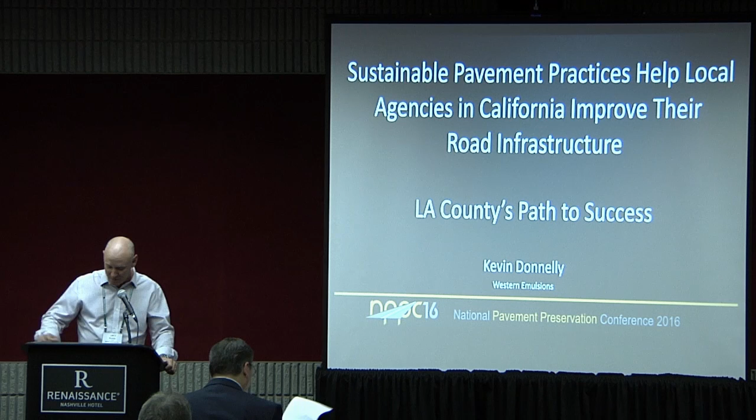Right now, agencies have less money. They're trying to take a limited amount of dwindling funds and stretch those dollars further. We keep getting hit with gas tax issues that are taking money out of the system.

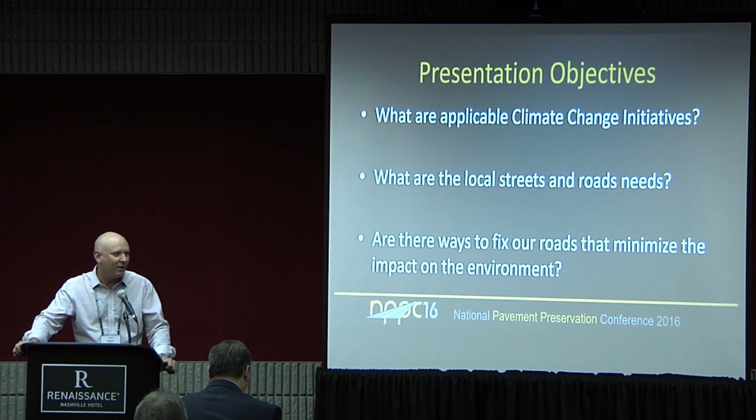So in a time like this, some of the questions that were asked are: what are the applicable climate change initiatives that we have, and we'll talk about those today. What are the needs of the local streets and road system in California? And are there ways to fix our roads that minimize the impact on our environment, that kind of fall in line with some of the things that the government is asking us to do?

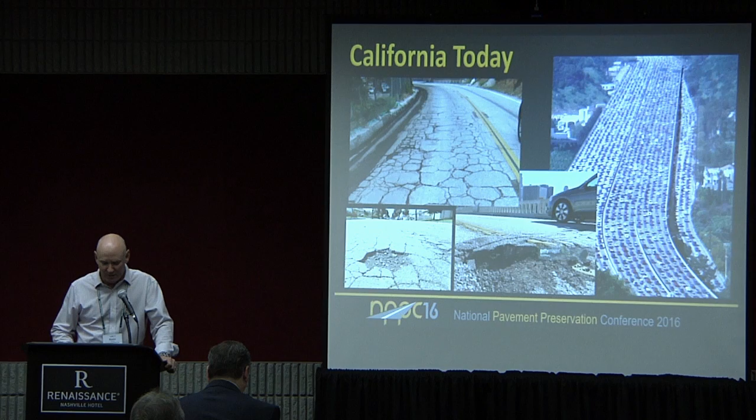So California today is much like a lot of other states. We have a lot of congestion in California, as some of you know who visited some of our metropolitan areas. We have an infrastructure that I wouldn't say is failing, but is on its way to failing with the amount of funding that we're putting into the system. So we have a lot of challenges.

One of the things that local agencies have been tasked with is how do you do more with less? Can you maintain your system at a lower cost and still meet some of the greenhouse gas reduction targets that we've set in California? And how can we achieve a balance between statewide goals and bringing our local streets and roads into a state of good repair? Hopefully these are questions that you'll understand how LA County responded to and how they're making this happen today.

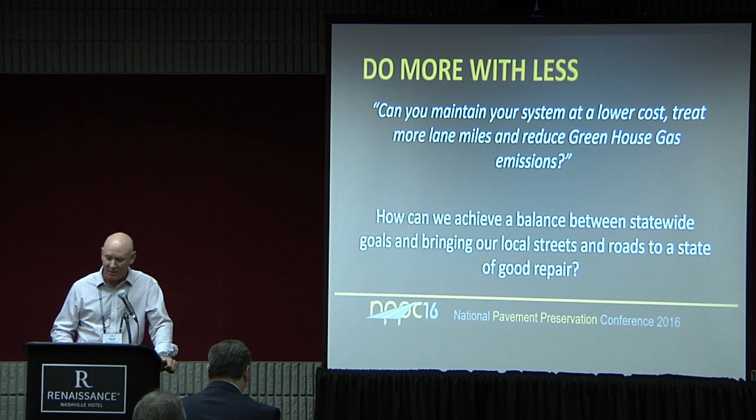So if we look at some of the transportation needs, in 2007 a committee was formed by the 58 counties and 482 cities in California to come up with an estimate of what the costs were to get local streets and roads funding. We found that the state was getting a lot of funding, and they had a very good system for going out and quantifying what their needs were. But the local agencies weren't doing such a great job.

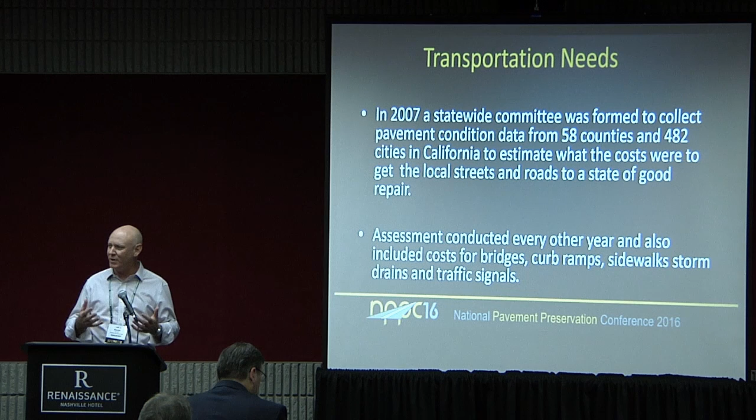Mostly because individually they were doing a very good job of having a PMS system and collecting data and going to their local boards and city councils to get funding, but they weren't taking all that information and putting it together and taking it to the state. So back in 2007, I was part of that effort. I was still working for the County of Santa Barbara, and it's helped us collect some real valuable data over the years.

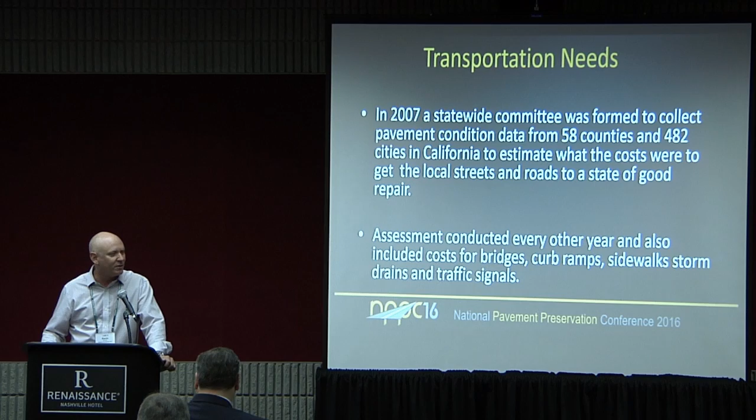So the assessment's conducted every other year, and it does include costs for bridges, hardscape, traffic signals, and other things in the county and city right-of-ways.

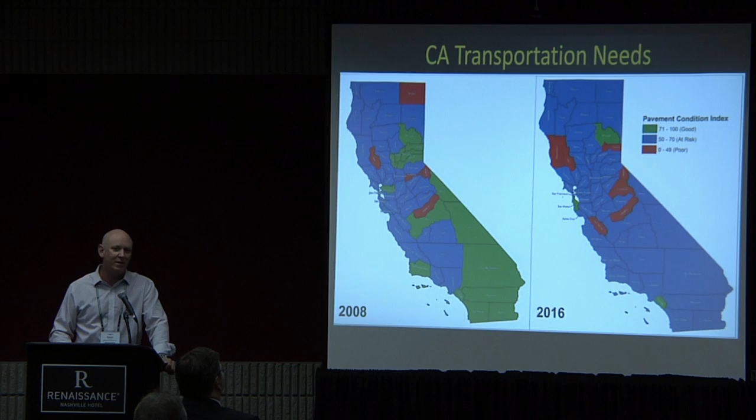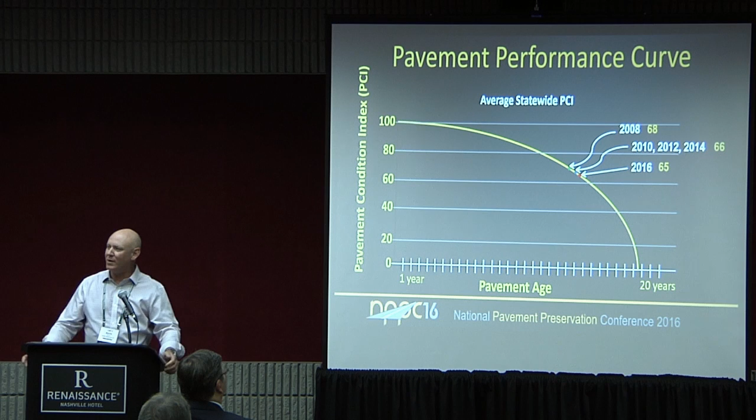In 2008, we were at a PCI of 68. Now we're at a PCI of 65. Some funding has gone into the system that has really helped to slow that down just a little bit. But we keep seeing every year, like specifically this year, our gas tax is kind of a mess. They gave agencies too much money, so they held back a lot of money this year. So there wasn't a tremendous amount of work going on that would help prop up or sustain that PCI. So we're in a bit of trouble.

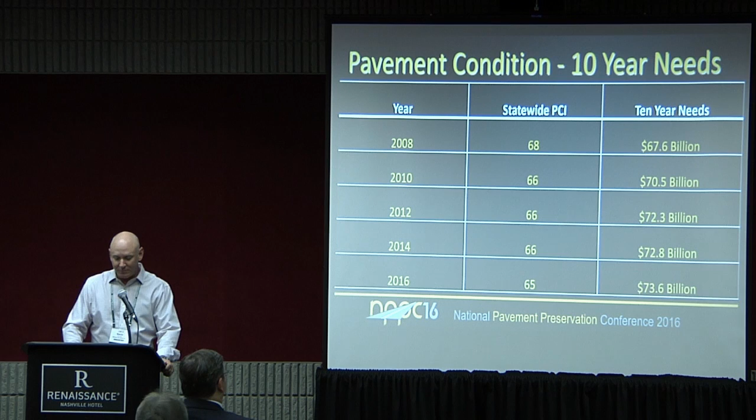Our 10-year needs look like this. You could see we're $67.6 billion in 2008. Now we're up to $73.6 billion. Once again, that's not just roads. That includes hardscape and anything that's in the right-of-way. But we're at a PCI of 65.

So currently our funding is $2 billion per year. And within 10 years, we're going to drop to 54 PCI if we stay at that. So we're on that rapid decline right now. And our failed roads would go up to 25%. Right now we're at 6%.

Once local roads are in a state of good repair, which we've targeted a PCI of 82 as our best management practice, once we can get them up to that level, it would only be about $2.4 billion annually to maintain that. So there's a lot of effort underway to go out there and attain that funding through new taxes, through changes in gas tax, pulling some fees in from other areas. But there's about $7.3 billion annually for 10 years on the table right now that we're hoping the California legislators will get their act together and pass soon.

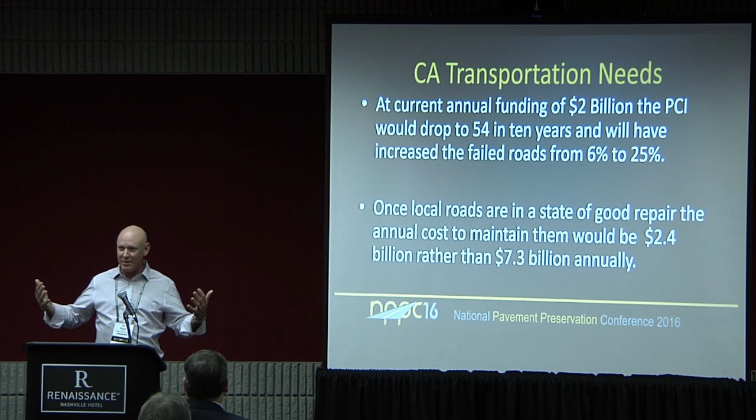Now, I've been doing this a long time, and the good news for us is that this is the first time there's been real serious discussion about this, where we actually find on both sides, Democrats and Republicans, starting to talk and get together and know that this is a big problem that we need to fix.

So that's good. The local streets and roads report estimated that if agencies statewide utilize sustainable treatments for 50% of their projects, about $1 billion annually could be saved.

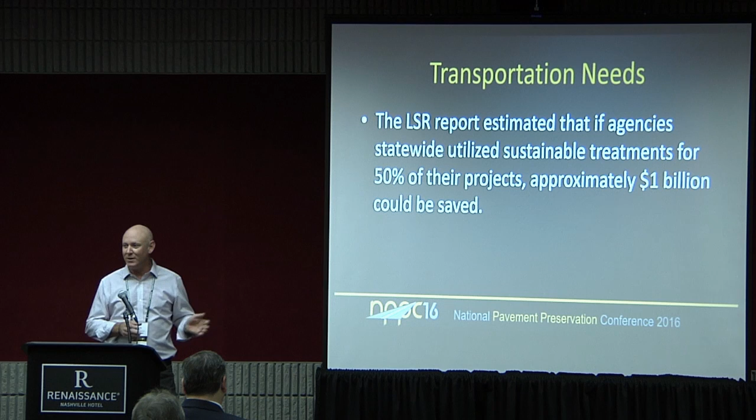So sustainable treatments would include your preservation treatments as well as recycling. Asphalt recycling, cold in place recycling, a little bit of hot in place recycling has really moved into California, and it's helped plug some of those holes because it's cost effective, it's utilizing materials in place, and is considered a sustainable treatment. One of the things the report said is that if agencies, and not many of them are doing this right now, but we're hoping more will, would take 50% of their projects and at least consider them for a recycling alternative, another $1 billion could come back in our system that we could spread out and help preserve, maintain, and keep safe our roads.

So now that we've talked about the need, let's talk about the climate legislation. We have an assembly bill, AB 32. It was established to reduce greenhouse gases to 1990 levels by 2020.

I will tell you, I've grown up in California. I grew up outside of Los Angeles. I remember when I was a kid and I was 12 years old playing soccer out there, and you could barely even breathe. Your chest would hurt so bad from all the smog. So in California, we've made leaps and bounds in reining that in. They've done that through vehicles that get better gas mileage, and lots of other things we don't need to go into today. But the air's cleaner, and they want us to attain 1990 levels by 2020.

And just recently, they've now said that by 2030, they want to reduce the 1990 levels by 40%. So these are huge, huge targets.

So this is a big challenge for agencies because although they haven't come out and mandated that you do this on your roads when you're fixing your road system to reduce greenhouse gas, what they've done is they've told agencies that you need to come up with a strategic plan for your communities. You need to look at rural areas, you need to look at urban areas and figure out how to reduce greenhouse gas. And every county and city has had to put together one of these plans.

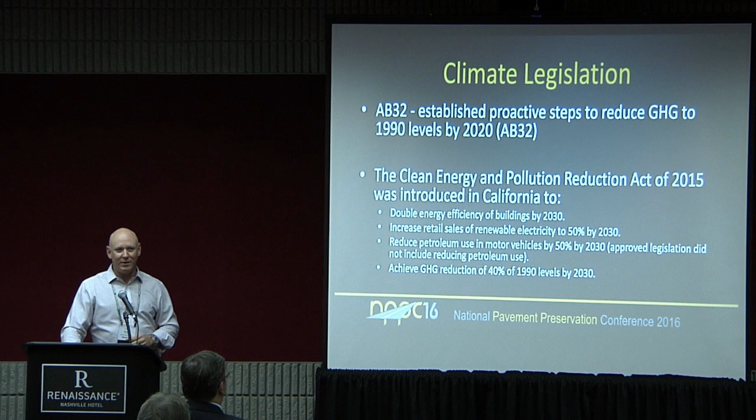It was not forced on them, but it certainly became part of the culture over there on how to do it, and now they're doing their part. It almost seems, especially in California, that we're going to be mandated soon to look at this on every single treatment that we do. I feel that it's going that way, and agencies like LA County are going to be at the forefront of this.

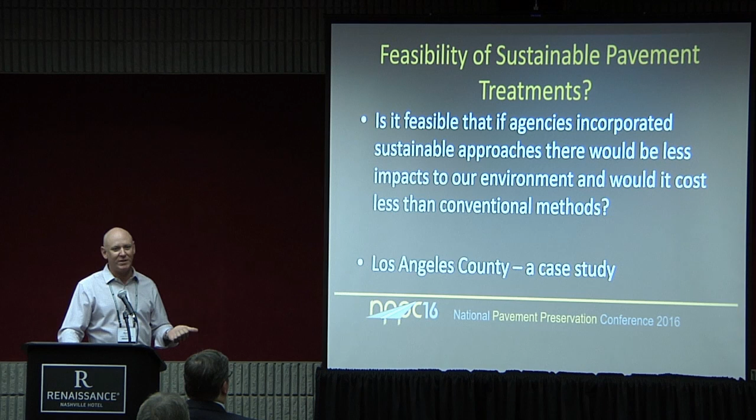Is it feasible that if an agency incorporated sustainable approaches, there would be less impacts to our environment? Yes. And would it cost less than conventional methods? Well, yes, I think in both cases you'll find here—I'll show you LA County's program a little bit, and you'll see that they were able to accomplish both these tasks: reduce greenhouse gas significantly and save quite a significant amount of money.

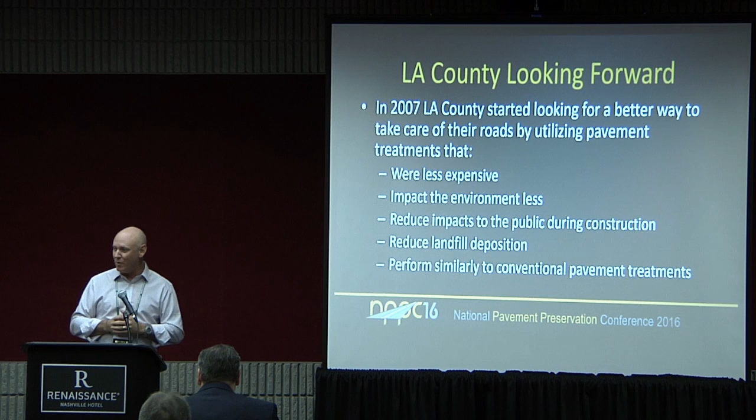So in 2007, LA County started looking for better ways to take care of their roads. They were looking for treatments that were cost effective, less expensive, had better life cycle costs than what they were doing, had less impact to the environment, and reduced impact to the traveling public, reduced landfill deposition. In California, we have diversion rates from landfills of 69 to 75%. That's a big deal for us. If we're taking asphalt off the roads and putting them into landfills, that's the wrong way to be going. So most agencies are finding ways to reutilize things and not do that.

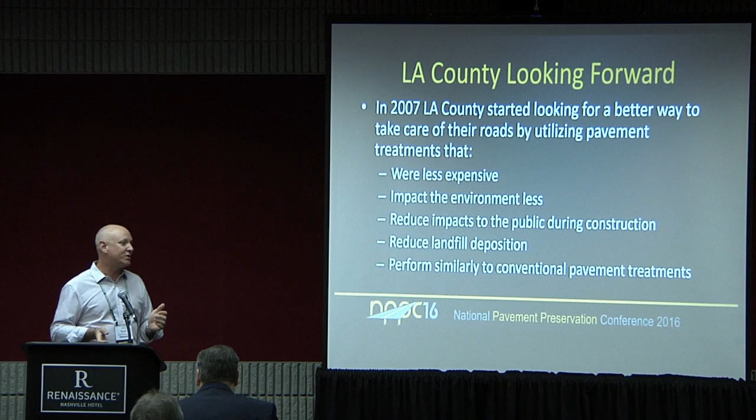They were also looking for treatments that were going to perform similar to conventional treatments. Obviously a fog seal is not going to be the same, or a slurry, or even sometimes a cape seal is not going to be the same as an overlay. But what else was out there? They started looking at cold in place recycling.

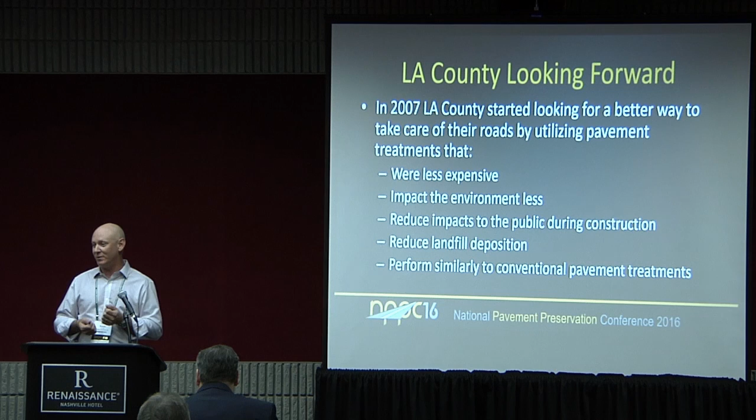Prior to all of this, LA County's approach was really a worst-first approach. When I first started working with them in 2009, that's pretty much where they were. They were taking a lot of recommendations from their board of supervisors, a lot of phone calls coming in, and trying to put some oil on the squeaky wheel. They were utilizing an antiquated pavement management system that was very limited in its capacity to help them plan out into the future. They were doing limited preventive maintenance work. Their typical reconstruction methods were remove and replace—lots of hot mix projects out there, a lot of mill and fill.

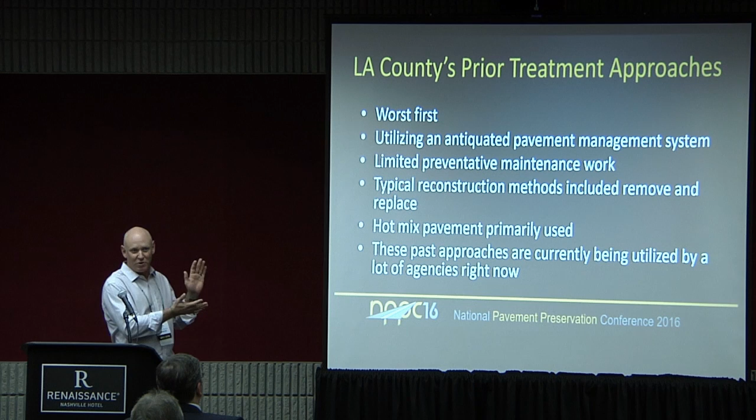And these past approaches are currently being utilized by a lot of agencies in California right now. So LA County has been somewhat of a leader with adopting this program and moving towards realizing some of its benefits.

Their sustainable approach was set pretty much in 2008. This is a board-approved, three-pronged approach. They were very good and proactive in how they set this up. They didn't just go into a back room and do this—they threw it all out there for everybody: design, construction, maintenance. Everybody was involved in this process to come up with a program that was acceptable for everybody, that had a little bit of input from everybody. And this is what they came up with and took to their board.

Number one, take care of their good roads first—pavement preservation is the highest priority for them. Preserve what's good, push off that costly rehabilitation as far as you can into the future by using lower cost alternatives. Number two, reutilize materials in place, or use recycled materials whenever they can in their treatment selections. This would include things like RAP, taking their grindings and turning them into RAP chip, slurry aggregates. And three is reutilizing existing materials in place, mostly cold process—cold in place recycling, cold central plant.

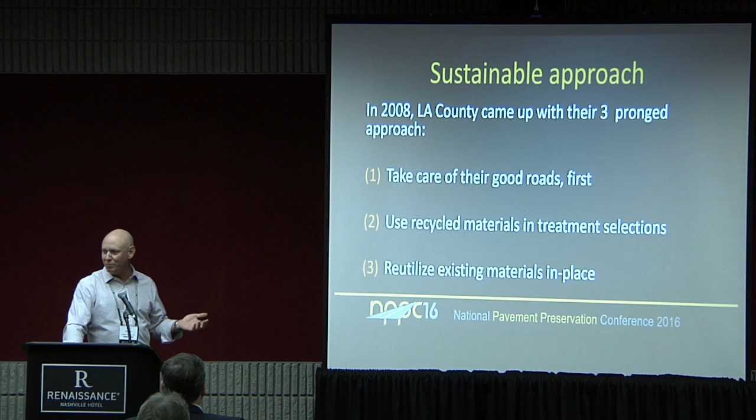So we'll go through these just a little bit here. Typical performance curve for them—this isn't very detailed, but it just gives you a little idea of what their costs are. They're trying to catch roads up there in that preservation state towards the top, and keep them from falling down into that much more costly area down below.

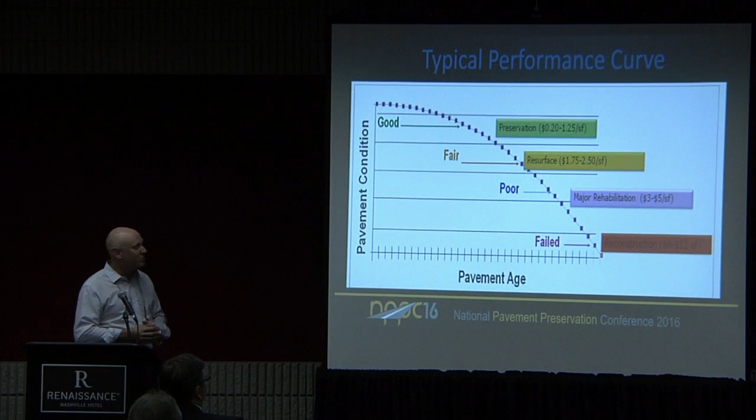For them, pavement preservation is 4 to 10 times less costly than conventional hot paving. Preservation treatments usually result in about 80% less greenhouse gas emissions and energy use. I believe the National Center for Pavement Preservation actually set those numbers.

And micro-milled surfaces—I mean, they micro-mill just about everything prior to any treatment. That could be a whole other discussion, but from my standpoint, what it's helped do is with rideability, which has always been an issue. Cape seals are a big part of their program, but cape seals don't always fix rideability. So what they found is if they go in there and micro-mill, just take off a little tiny bit off the surface, they can actually make that road a lot smoother, and there's a lot more public acceptance of this.

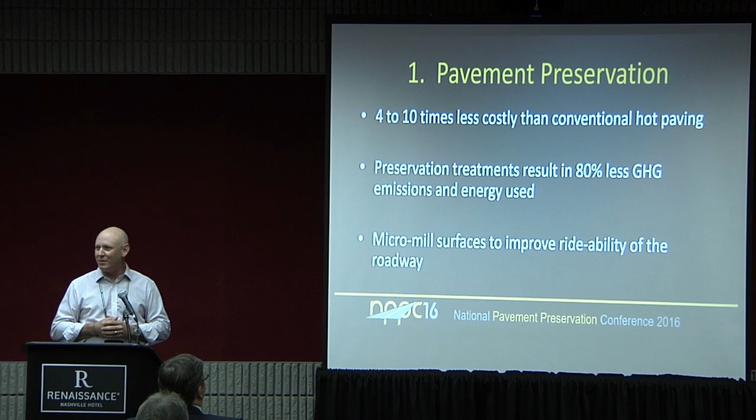That's been a huge part of their program, because you don't want to go out and implement a program like this and have the public go crazy on you. What they've been able to do is mitigate some of that by putting out treatments that are smooth, resemble an overlay, and are easily publicly accepted. So that's been great.

We're just going to go through some of the projects they've done. This is Doublegrove. This was a pavement preservation, really a stopgap measure. They needed to preserve this area and stretch the dollars out as long as they could, because they knew they'd be coming back here in the next 10 years. They just wanted to put something down to help keep the roads safe and in good shape.

This is located near the city of West Covina. It was 27 lane miles. They chose a pavement preservation strategy of micro-milling with a Cape seal on top. Some roads just received a crack seal and a RAP slurry seal. The Cape seal is essentially a scrub seal using a RAP chip with a type 2 RAP slurry on top. So once again, they're reutilizing materials in place, part of their sustainable program.

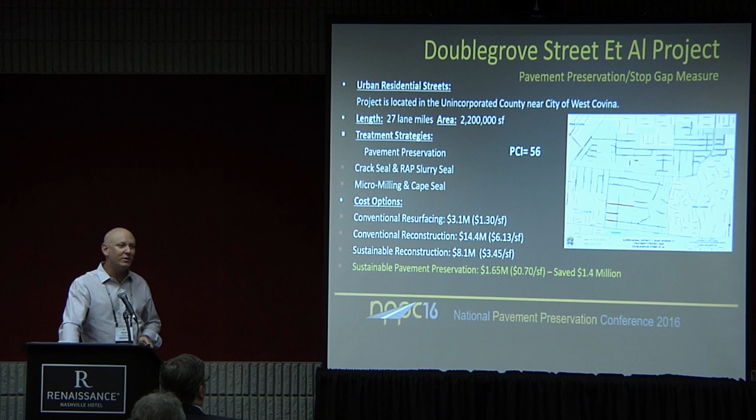You can see the cost options down below. They chose the sustainable pavement preservation treatment. It was about 70 cents a square foot, resulting in about a $1.4 million cost savings for them over a traditional method of just conventional resurfacing.

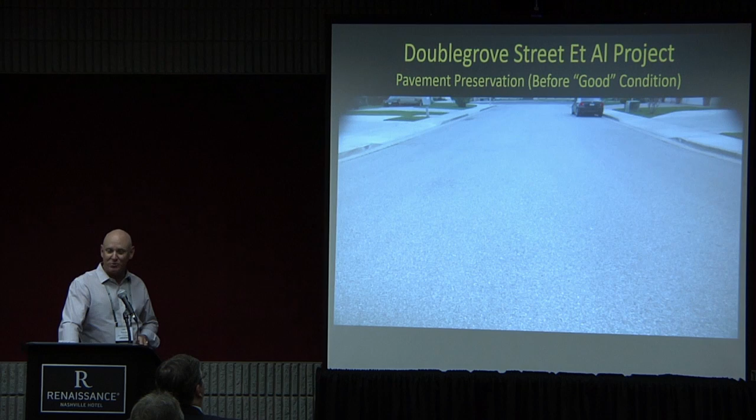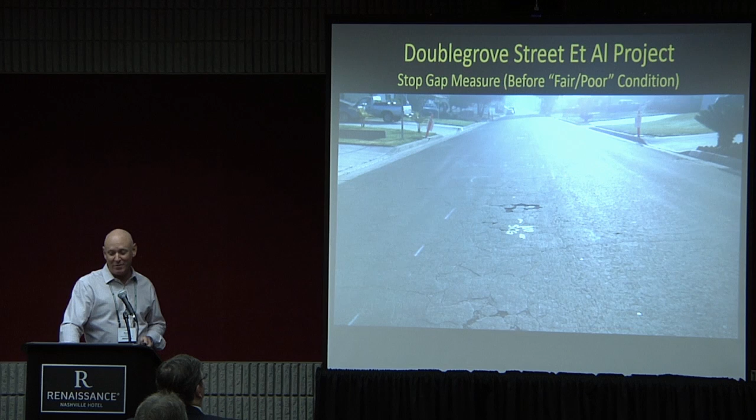Now, most people would look at that and say that's a really good road. There were some roads in that area that looked like that, that just received a crack fill and a slurry on top. There were a lot of roads looking like that. Another part of this is, this option was really appropriate for them. Lots of these areas have 2 inches of asphalt over native, and some of them don't even know what's underneath there, so they don't want to open it up.

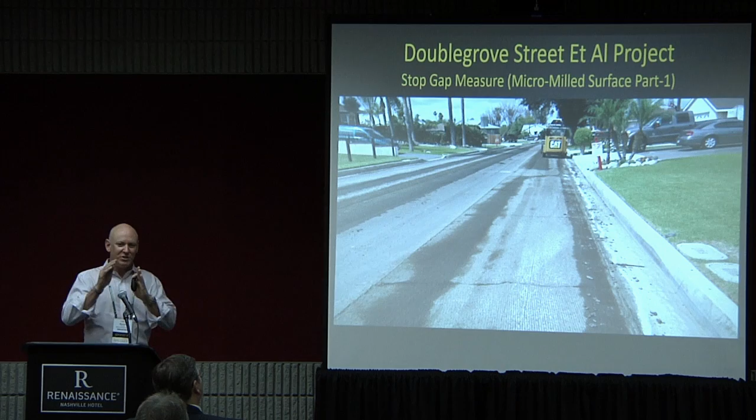So this was a very good treatment for that, to keep them from getting in trouble. Some minor dig outs on the project. They'd go out there and do the micro mill. You could see the micro milled surface there, smoothing out the roadway. Sometimes you get those bumps where the pavement's coming together, and they'd mill that off, actually shrinking that crack face just a little bit, which helped keep the cracks from reflecting back through.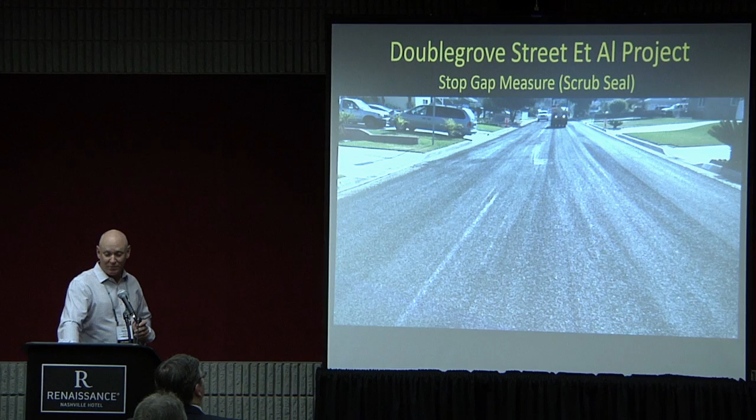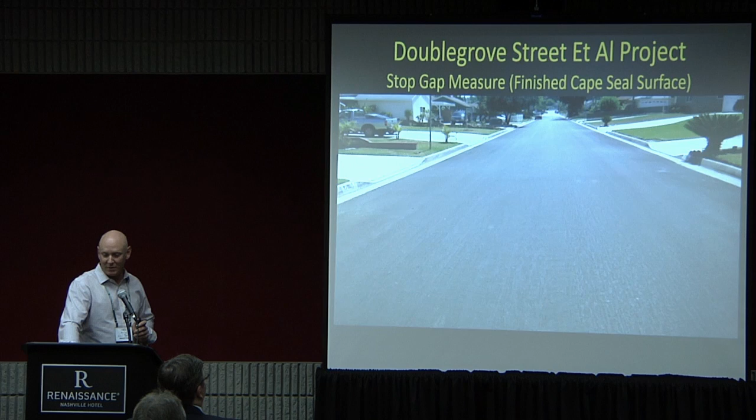They'd do the scrub seal, pull a broom, and push the material down into the cracks. You see the scrub seal getting rolled with the RAP chip on top, and RAP slurry placed on top of that. There's the finished surface. Happy residents - they've got a road that's now going to last 7 to 12 years, and they'll be out there again for their next phase in about 10 years.

So number 2 on their list was use recycled materials in project selection. RAP aggregates - right now new hot mix placed is about $85 a ton. When you start looking at RAP, the cost is about $30 a ton. So it really becomes important in the CIR.

But when LA County set up this program, they wanted to take all their assets. That's money to them - they realized that is an asset with a tangible dollar attached to it. So they take everything, stockpile it, and put out a small contract to have people come in and process it. They'll make their RAP chip, their RAP slurry, and reutilize them in these projects.

These are all contracted projects. There's a whole other side of the program, their in-house project up in the North County area, where they do this too - incredibly cost effective, probably the lowest cost in the state for going out there and doing a scrub or chip seal, because they're reutilizing everything in place, using their own crews.

Very good program. Pavement millings are resized and reused for their pavement treatments, and for them this helps avoid removing raw materials from the earth, which is part of this whole greenhouse gas discussion.

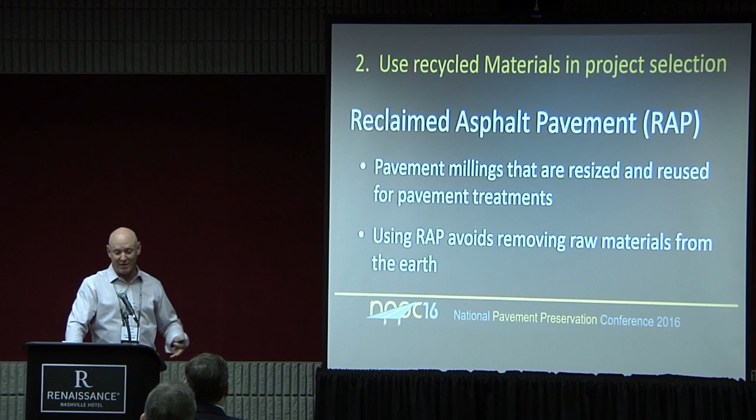They've used 100% RAP on all of their projects since 2012. 75% of the materials for their base pavements utilize RAP in one way or another. They've recycled 640,000 tons of RAP just in the last 4 years - a huge amount.

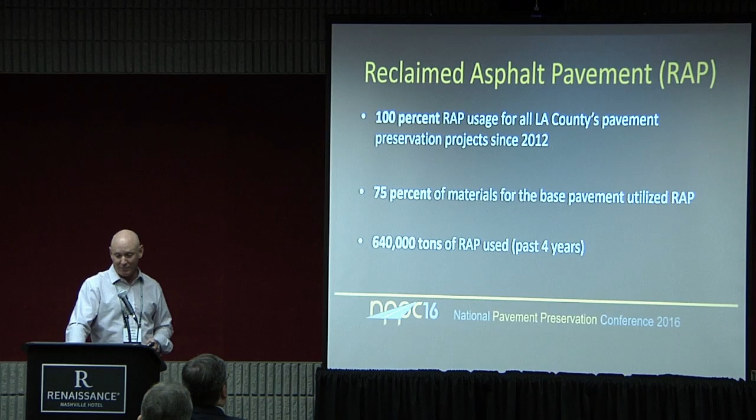The RAP slurry, like I said, is a big part of the program. It's a conventional slurry, for those who haven't seen it or used it before, that's got a type 2 RAP aggregate in it. It's got a lower emulsion content because of the higher residual of the RAP content.

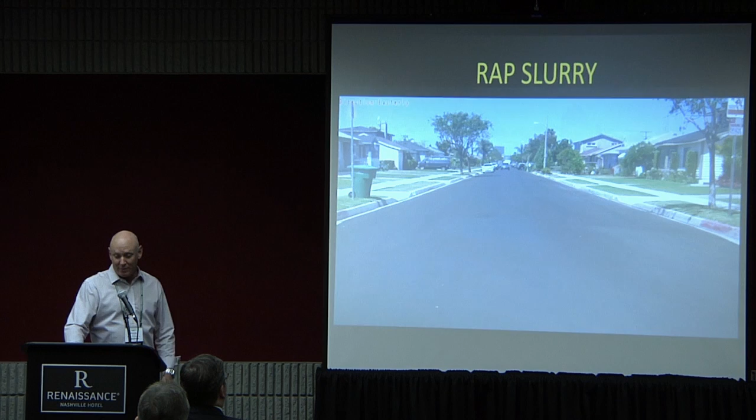I particularly like it because it's placed and rolled, and it looks really good right off the bat. And because it's rolled, it reduces scuffing from steering and power steering turns, so it's a really good part of their program. They're very happy with it, and we see more agencies around them moving into that too.

So the third prong in their program is utilizing materials in place. The objective is to reutilize existing asphalt using techniques such as cold in place recycling or cold central plant recycling, adding strengthening materials like cement, lime, and emulsion to the existing material below the pavement. With cold in place, they strip off asphalt, stockpile it, cement treat and process that material, bring it back as a cold central plant mix, and put it on top and cap it. That's become a big part of their program, because now they're basically reconstructing the road for a lot less money.

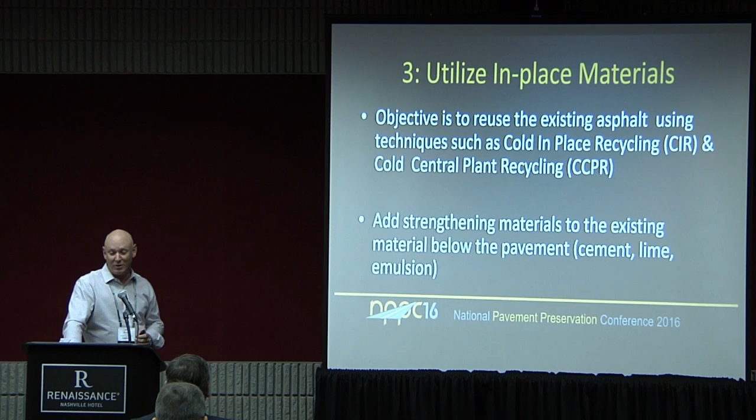Here's a CIR project that we participated in. This was in 2011, kind of a partnership project with FHWA. It's 12 lane miles, PCI was 47. This is up in a mountainous area that goes from North County, through the mountains, down into the LA County basin towards Los Angeles.

One of the things about this project is it was supposed to be a conventional mill and fill, but they couldn't figure out how to get the material up there. This is a windy road, up in the middle of nowhere. The closest plant might not have been able to get it there hot enough, so they were concerned about that. So they looked at CIR as an alternative, and it was about $520,000 less and could accomplish the same thing they were looking for. So they went ahead and did that.

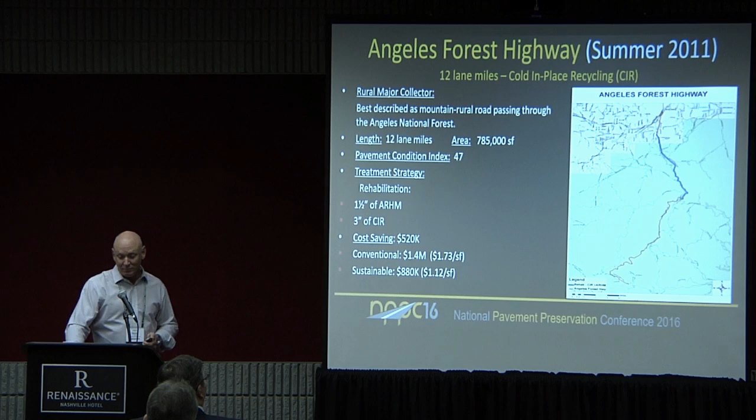One of the differences is originally they were looking at a 2-inch mill and fill, which would have left a crack in the 5 inches of pavement that was there. With the 3 inches of CIR, they actually took out more of that crack, so they bought themselves a little more time before those cracks migrate back up through the CIR mix. So this was a very successful project.

The project was so successful that FHWA came back and said, let's do another 33 lane miles of road up there. So they continued on with the treatment. Compared to the conventional method, it was $2.58 million in cost savings.

So one thing that's not quantified here, and I'm going to show you at the end, is the cost savings of all these treatments combined for their program, and also the greenhouse gas reduction, because that's another part of it. That's why they chose a lot of these treatments, because it significantly reduced the amount of truck traffic and greenhouse gas emissions.

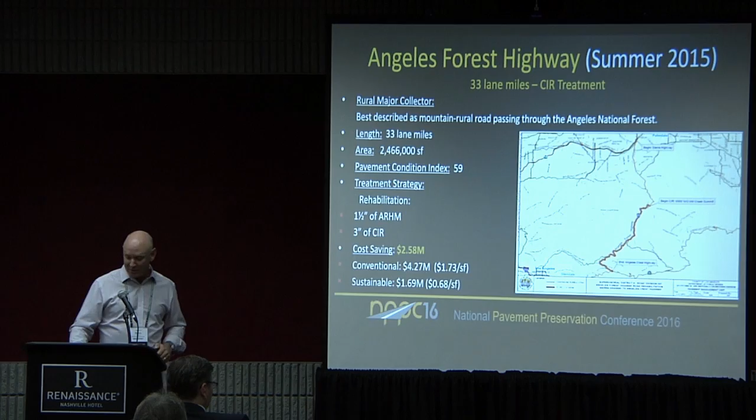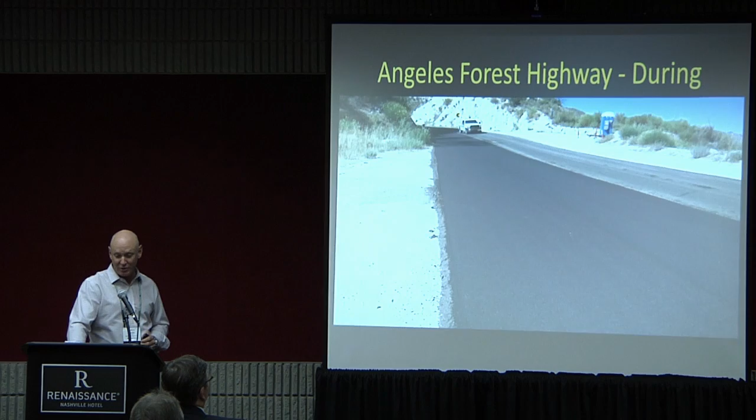So Angeles Forest before, in this next section, during construction you see them paving there at the CIR train, and after.

Soil stabilization, I talked about how they do a lot of cement treat. They use an engineered approach that improves the strength and stability of in-place materials, and it avoids a lot of the costs associated with removing and replacing in-place materials. It takes a lot of trucks off the roadway, less impact to the traveling public.

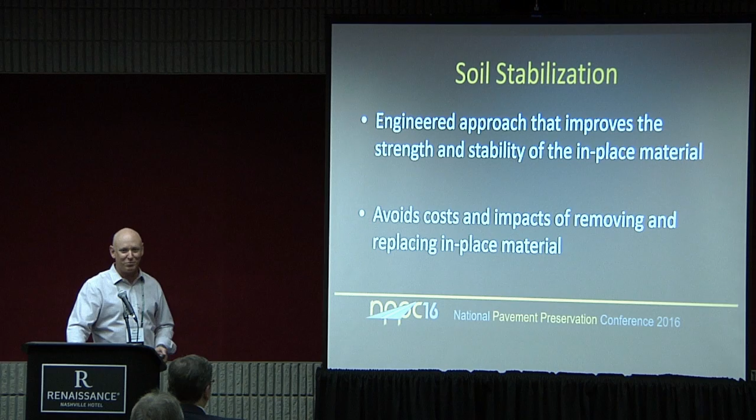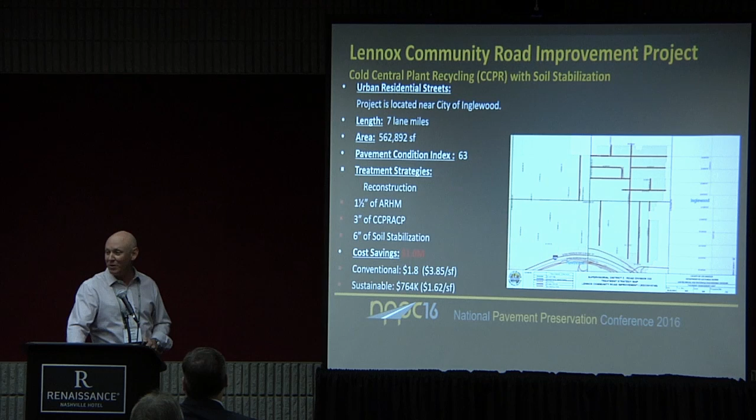The Lennox Community Project was over near LAX, near the city of Inglewood, and this was a cement treat with 3 inches of cold central plant recycled on top, and 1.5 inches of asphalt rubber hot mix on top. About $1 million in cost savings.

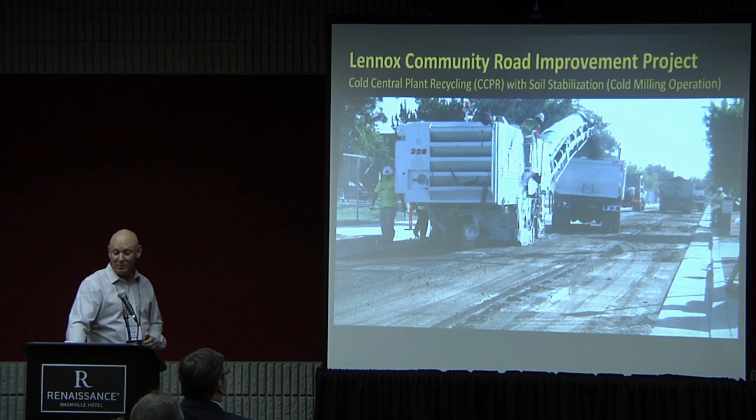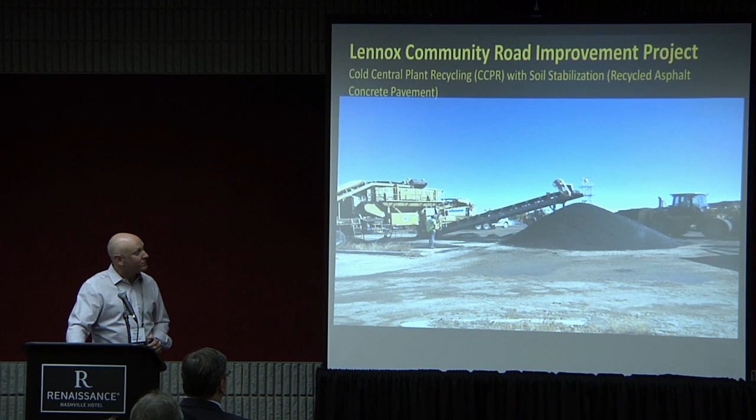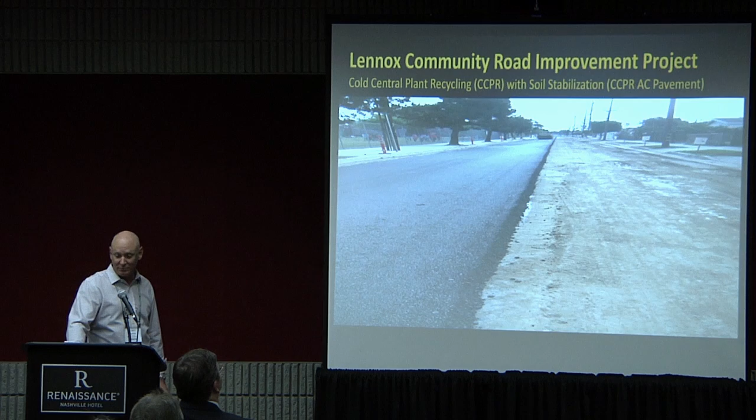You see how distressed the roadway was prior. They milled off all the asphalt and stockpiled it close by, about 2 miles away. They came in there and did the cement treat and soil stabilization. There's the stockpile, they're processing the RAP. The RAP comes back and gets paved right on top of the new soil stabilized section. And there you have the RAP section, or recycled section, completed.

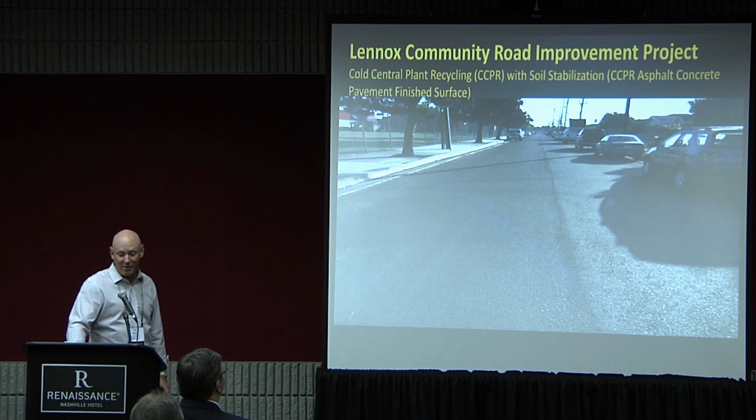That sat open for about 2 weeks, and then it was capped with the asphalt rubber hot mix. There's your finished surface.

So the benefits of the sustainable approach for Los Angeles County are cost savings of up to 50% compared to traditional methods, and 80% reduction in greenhouse gas emissions. They're maintaining the Earth's natural resources, and there's a reduction in construction truck traffic. Looking at cold in place recycling alone, you're taking 82 trucks off the roadway per lane mile of import-export, that's a lot of trucking. There's also less construction working days for most of these treatments, so less impact to the public.

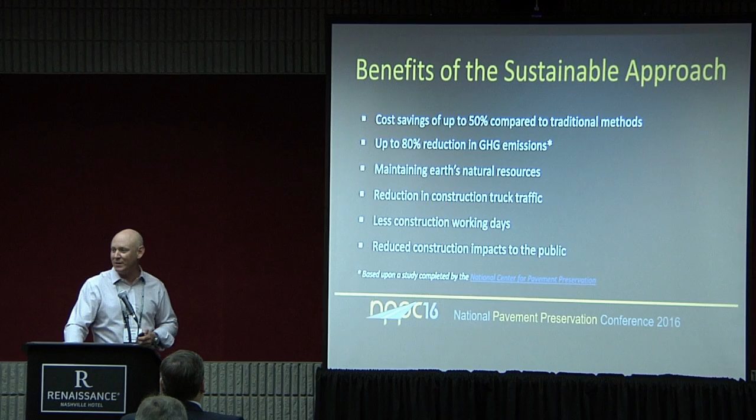You can see the cost savings over here. They've saved $29.4 million in 5 years. This is through 2015. We're still putting together numbers for the 2015-16 fiscal year.

Reduction in energy consumption: cold in place recycling is a big one at 72%. Pavement preservation is a big one at 80%. But total, we're looking at 76% over traditional methods of greenhouse gas reduction. So yes, they did meet those challenges of AB 32 and some of the initiatives they have in California with regards to sustainability.

You can also see down there the total number of lane miles. They use a lot of rubber treatments, a big proponent for recycling tires, so recycled tire crumb rubber into their asphalt rubber hot mix. They've taken about 730,000 tires and recycled them into their roads. And the amount of CO2 reduced from the atmosphere equals this over that 5-year period, 7,300 cars they've taken off the roadway. That's significant.

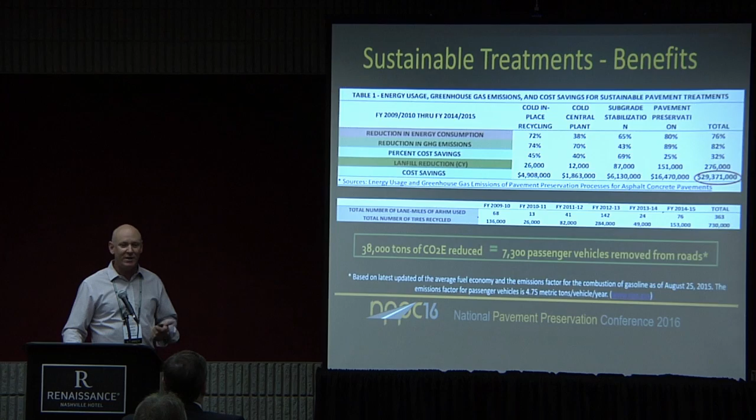So the program has been very successful. It's saved them cost, it's reduced greenhouse gas emissions, and has happy constituents. So it's been a huge success for them.

Pavement preservation projects, some takeaways: micromilling is a big one for them, works very well. Use of scrub seals and cape seals on fair and poor roads as a preservation tool and stopgap measure has extended the service life of those roads.

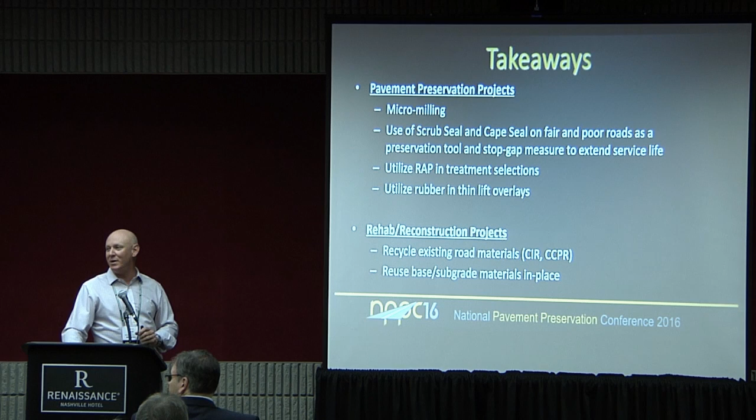Utilizing RAP in treatment selections has kept them from having to take more material out of the earth, and utilizing rubber in thin lift overlays has kept a lot of tires out of our landfills. The rehab and reconstruction projects, recycling existing materials in place like the cold central plant and CIR, gave them a life cycle on the roadway comparable to overlays. And the subgrade stabilization has saved them a lot of money over traditional reconstruction methods.

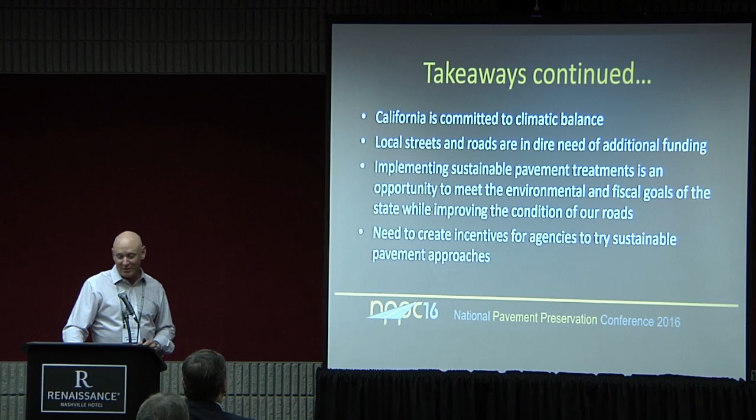California is committed to climatic balance. We know that we are somewhat of a leader in the nation with regards to this. We'll see how that goes, but it's been quite a challenge. Local streets and roads are in dire need of additional funding for us. Implementing sustainable pavement treatments is a good opportunity to meet some of the challenges of these environmental goals and also the fiscal goals we have to improve our road condition. We need to create incentives for agencies to try more sustainable approaches.

LA County, I'm sure this presentation will be up someplace, but LA County has a great website with a lot of information about what they're doing. It quantifies it. They've got great promotional materials that they use in-house for this stuff. I highly urge you to go check it out.

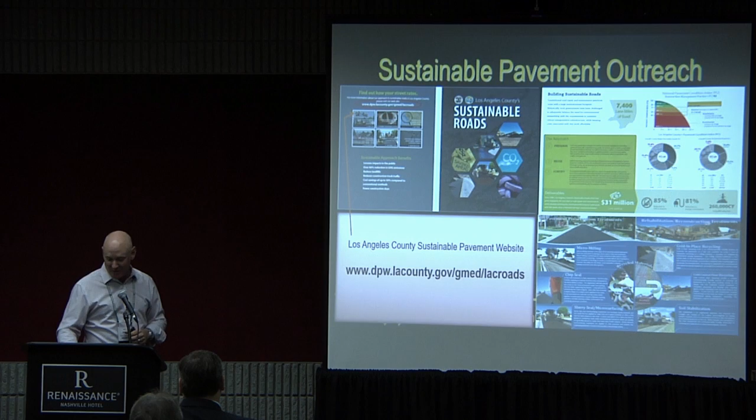We have time for a couple of questions. If anybody? I probably don't need the mic, but that's okay.

I'll use the mic. I was wondering, when you do the cement stabilization of the subgrade, you remove all the asphalt, I get that. How do you provide access for homeowners during that setup of the cement? That's a good question.

They ramp all the driveways. Everything's ramped, so there's only a very short period of time when they've got the reclaimer going through that they keep traffic off it, usually like a 2 or 3 hour window that street is closed. Once they've processed for a very short period of time, even though they're down several inches sometimes from the curb and gutter, they'll open it up to traffic, but they ramp everything first, so people always have access to their driveway except for that 3 hour window.

It's really not a huge impact. Every once in a while you get somebody who comes through upset that they've got to go up a 6-inch ramp or whatever, but it's not very impactful to them.

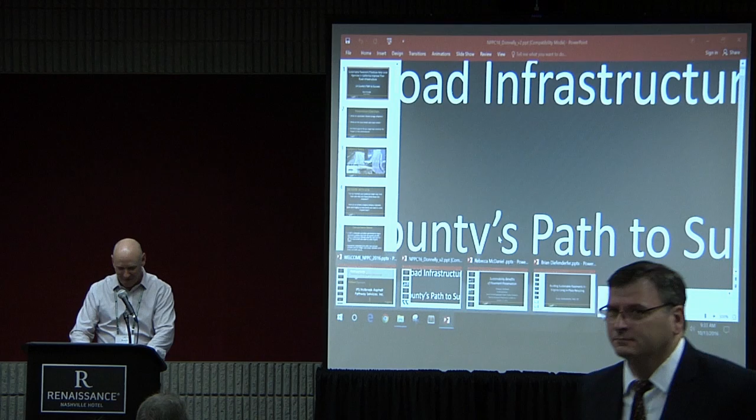Anybody else? What kind of pushback are you getting politically by going to this from the traditional mill and fill method, and how is that impacting what's going on? I'll tell you, politically, since I'm with Western and travel all over California interfacing with a lot of different agencies, we're not getting much pushback at all. The most pushback we typically get is internally in agencies, where maintenance guys have been doing it one way for many years, and design guys have been doing it one way for many years. It's hard to get the ship all together and turn in a new direction.

But politically, when you talk about presenting to any council or board that you're going to reduce greenhouse gas, like I was saying at the beginning, it's so much part of the culture, they love this story. You may get certain politicians who don't buy into it as much as others, but overall, when you're talking about a city council or five elected board members in a county, they're supporting this big time. They love the story.

One more question: typically, when projects are awarded, does the county take possession of all milled RAP, or does it go to contractors, does that change case by case? The county has a clause that takes possession of all RAP. It belongs to them, it is their asset. So that's one of the unique things LA County is doing that others aren't, is holding onto that asset.